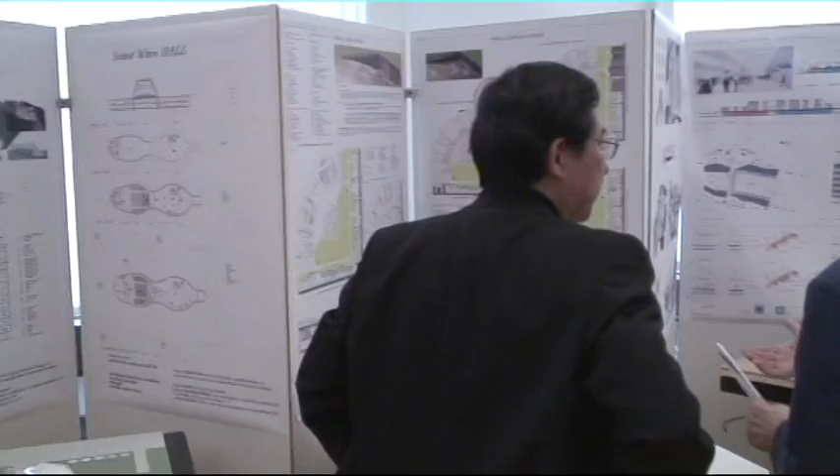In the framework of the agreement about scientific cooperation between the University of Tokyo and the Vienna University of Technology, the results of the research topic Disaster Mitigation and Security in Buildings have been presented every year since 2001. The projects of this continuous research have been exhibited also this year.

The Dean of Education, Professor Christian Kühn, and the supervising experts of the Vienna University of Technology, Professor Ewald Brückel on landslides, Professor Wolfgang Zagler on design for the visually impaired, Diploma Engineer Frank Peter on fire protection, and Dr. Kai-Marta Vossi on earthquakes, visited the exhibition.

We were grateful to welcome also the Minister, Mr. Ryuta Mizuchi, and the Cultural Attaché, Ms. Yuka Akamatsu, of the Embassy of Japan in Austria, who came to see our presentation. Mr. Mizuchi and Ms. Akamatsu showed great interest in all exhibited projects, which were explained to them in detail.

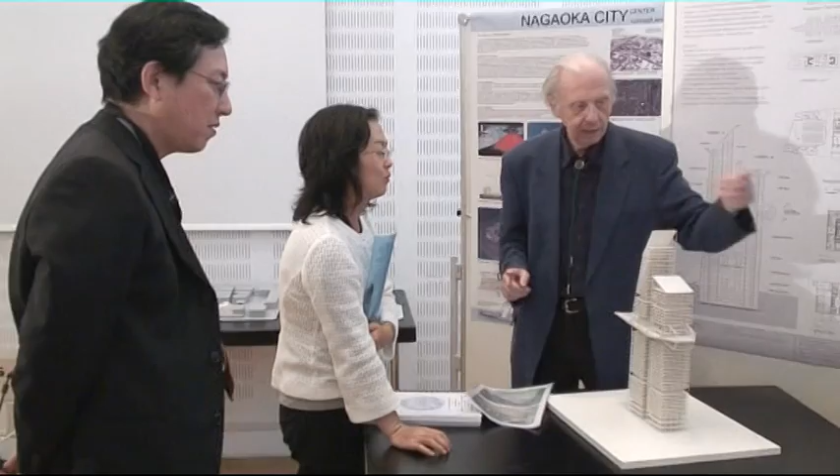In the framework of an urban design for the city of Nagaoka, the new city hall was planned by student Markus Grundnig. Another earthquake-proof skyscraper for Niigata was designed by Thomas Rief. Concerning earthquake protection, this high-rise building by Claudia Pillich was explained functionally and structurally as well.

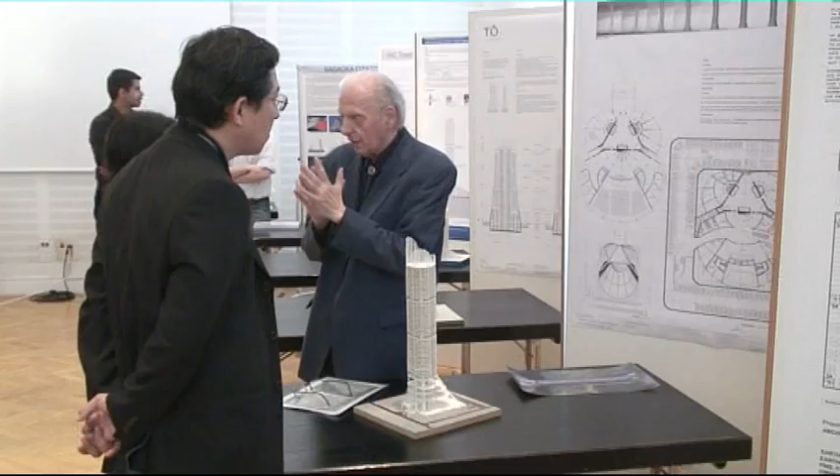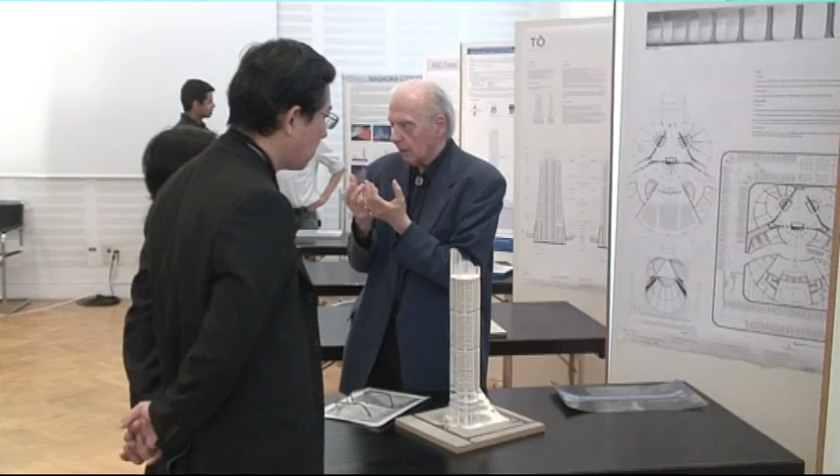Several high-rise buildings have been designed, each with a different construction, like this hotel and office tower by Milen Stefanov. Even this concert hall, designed by Mariam Farsi, can be converted into a crisis center in case of disaster. Anna Vera Deinhammer explains her design of a sports and training center in the landslide-prone area of Niigata to the Japanese visitors and Professor Brückel, who is specialized in geodynamics.

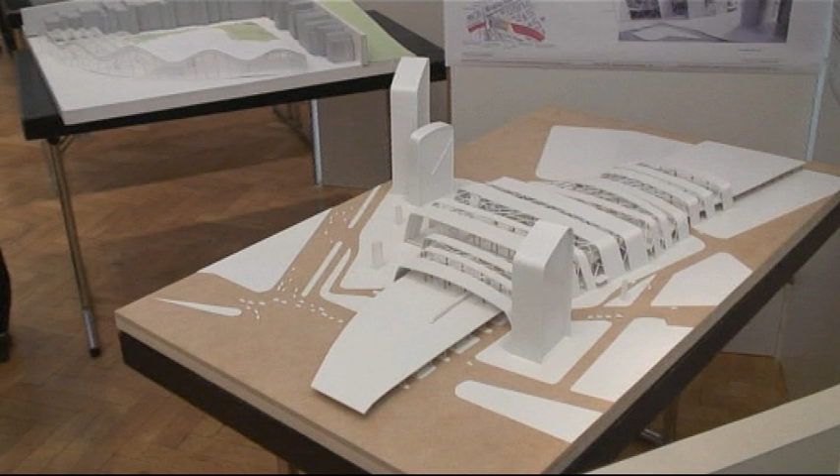This project by Michael Kist represents a new solution for a central railway station in Vienna. The possibility of studying information engineering should be given to visually impaired students. Nia Siarova is discussing her project with Professor Zagler, our expert on this topic. An alternative solution for providing workplaces for the visually impaired was made by Benjamin Schneider.

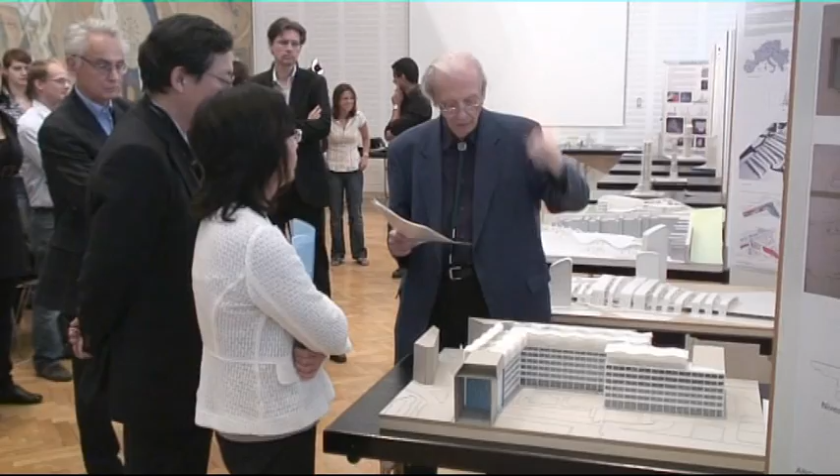Professor Zagler explains the recent innovations of his research group in the field of design for the visually impaired. He introduces small electronic devices, like a scanner which can distinguish different colors, or a tape measure which gives audio information about the measurements of an object.

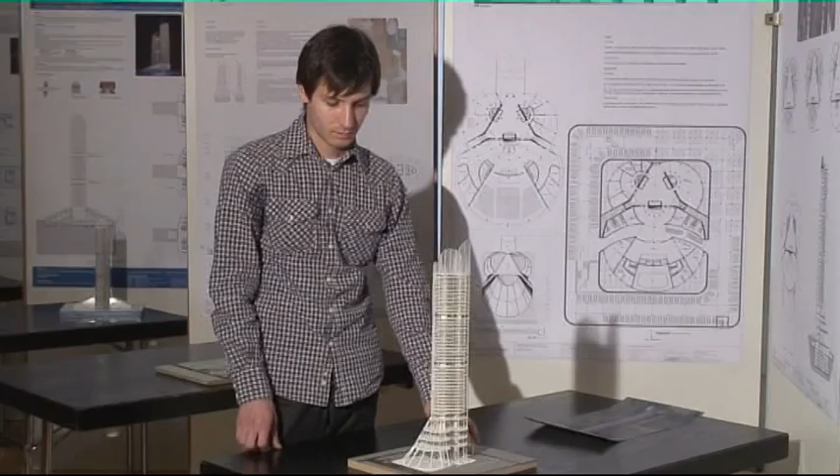The task was to design a tower building with a congress hall, offices, a hotel, and a shopping area. The building must be convertible into a crisis center to accommodate 1,000 victims in case of a disaster. The construction has to be earthquake resistant.

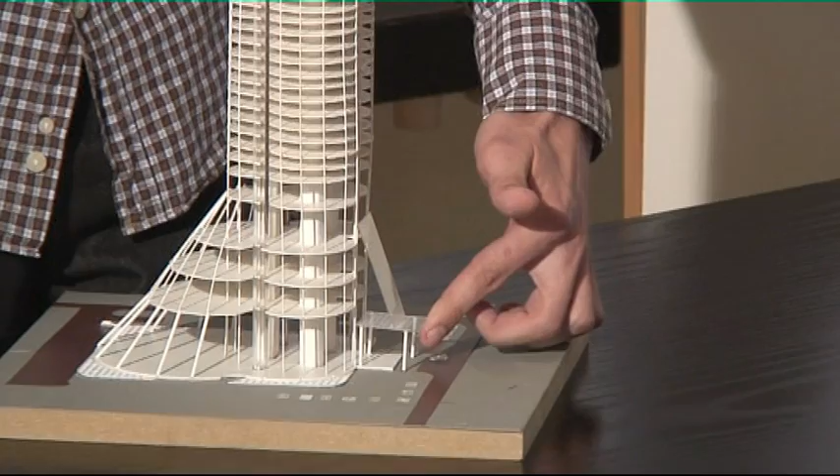On the ground floor, the entrances to the congress hall, to the offices, and to the hotel with access to the shopping area are separated. The building has 50 floors.

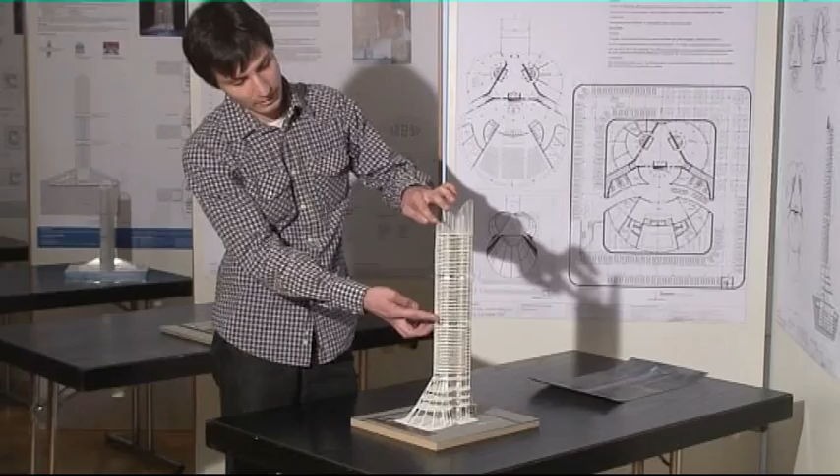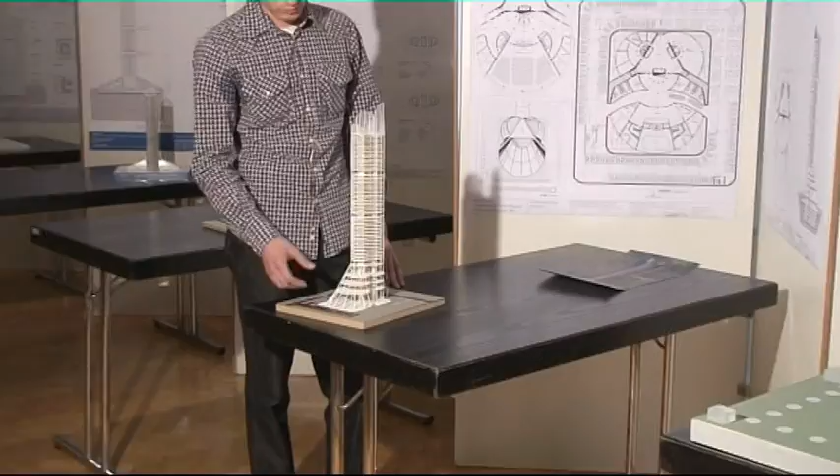30 of the floors provide offices for 2,000 employees. In the uppermost 14 floors, 250 hotel rooms are available. A congress hall for 700 participants is situated in the lowest part of the building. Rooms for press and seminars are also attached.

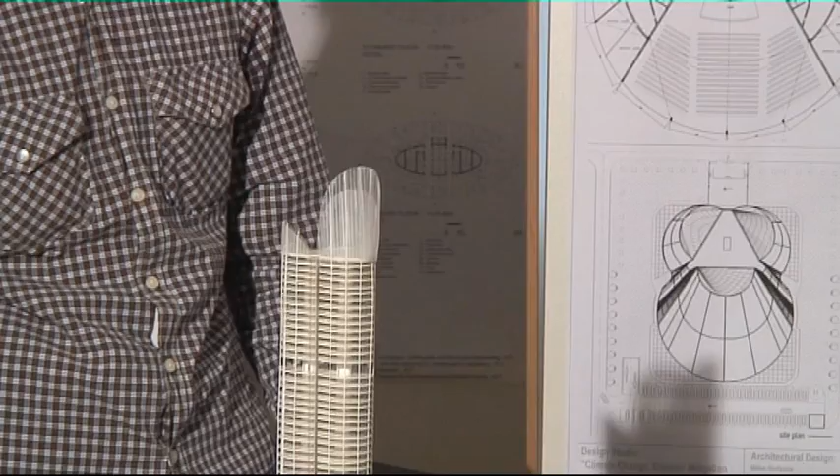In the upper construction floor, a sky lounge with panoramic view is provided. One floor is designed as a restaurant with a breakfast room. The facilities in the basement have two different functions: in the normal case and in the emergency case.

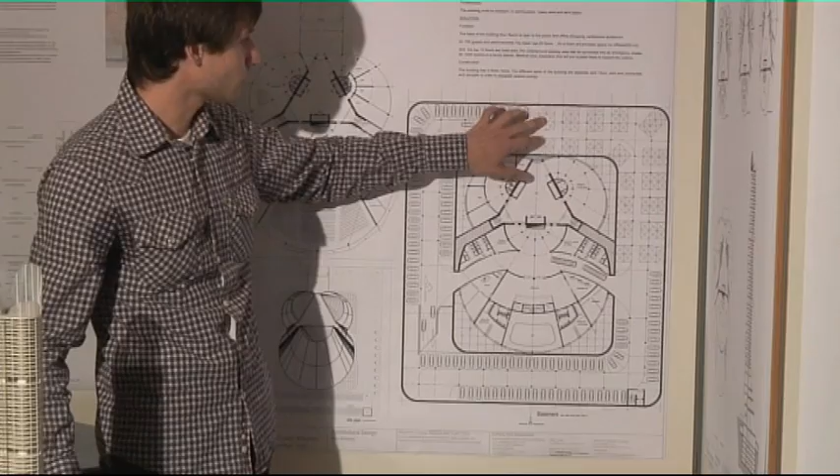The drive-in leads into the car park for 200 cars. This area can be changed to accommodate 1,200 victims by means of family stands, each for 6 persons. Cars and buses can bring the victims to the central hall, which serves for registration and first aid.

The onsen pool, which is available also in the normal case, can be used for hygienic purposes in case of emergency. The medical center for health control in the normal case can be converted into a clinic in case of necessity.

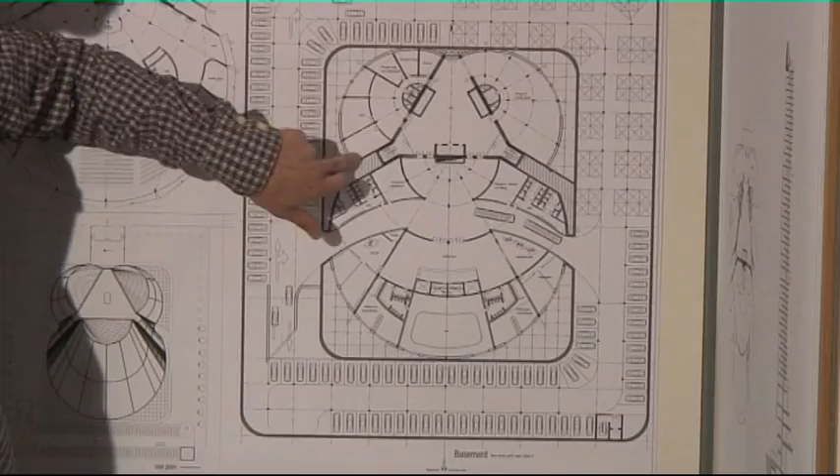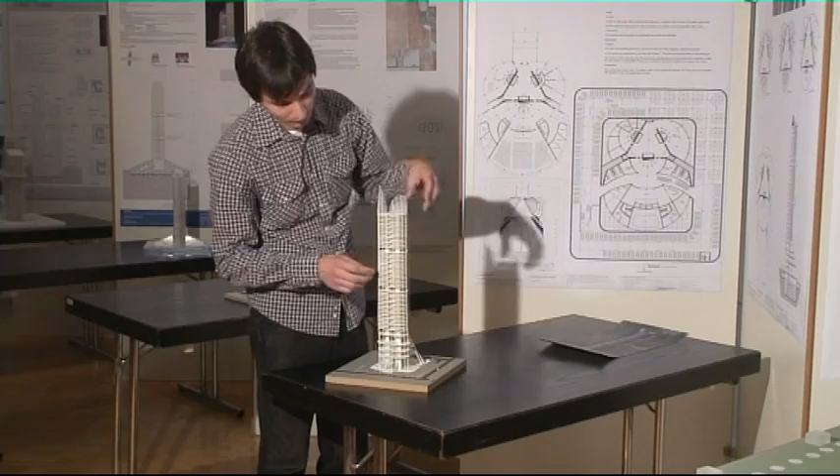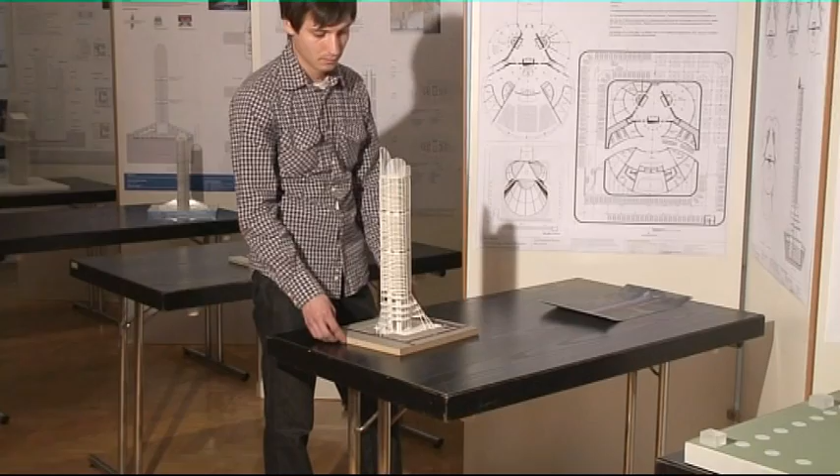In order to achieve a new type of earthquake-resistant construction, the building complex has been designed with 4 sections: 3 semicircular elements which surround a central core. The 3 surrounding elements have their own core for ducts and storage. The movement of the 4 building parts caused by an earthquake are different.

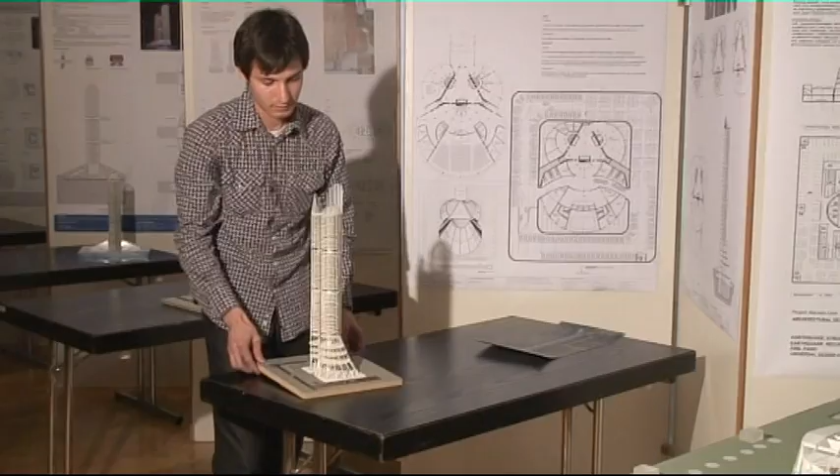On the construction floor and on the top, these parts are flexibly connected by dampers which maintain the stability of the complex and dissipate the kinetic energy by friction. According to the soil conditions, the reinforced concrete slab foundation is additionally anchored with piles into the solid ground.